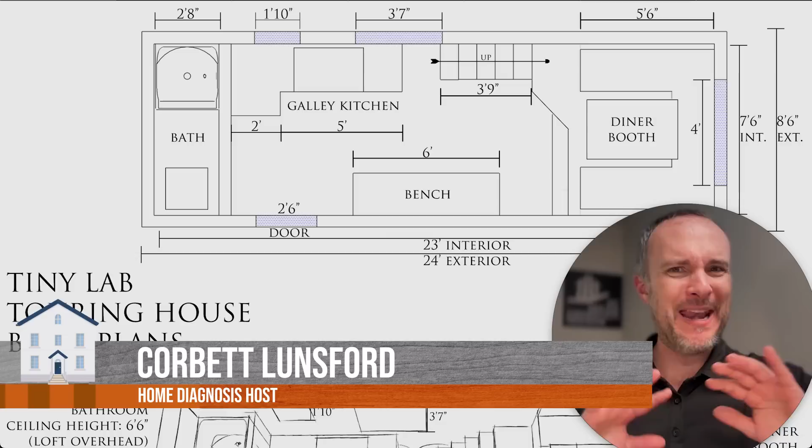I got asked a couple times recently whether we sell floor plans for high performance homes, and I am not an architect. I will show you a couple of the floor plans that we created that we then showed to architects and said, here, fix whatever's wrong with this. But I'd like to show you floor plans that I think are brilliant for certain reasons to do with performance, so that you can take those ideas, not necessarily the floor plans themselves, because every home should be different. I think that that's useful.

We'll start with the Tiny Lab. This is our high performance tiny house on wheels that we lived in for 5 years. This is what it looks like in real life. We built this. We built the plans ourselves. It took us about 9 months to a year to plan the thing. And we had to engineer this in very special ways.

When you put a tiny house on wheels on the highway, you're putting it through basically an earthquake and a hurricane at the same time. And we did that for 13,000 miles. So this thing is built like a tank. I edit these videos in that office right now. We haven't lived in there for a while because it was temporary. We lived in there for 5 years with 2 cats, 2 adults, and 2 kids by the end. And it was pretty tight.

So this is what the floor plan for that looked like. And I'd like to just show you the first basic level of circulation that I came to when I was designing this. It was very important to me that we have, obviously, spot exhaust. And when we talk about the 5 factors for ventilation, we got circulation. So we really wanted to handle that in this tiny space, make sure that air is moving around within it. Capture, which is what the bathroom and the kitchen are for. Humidity control, dilution air, pressure relief.

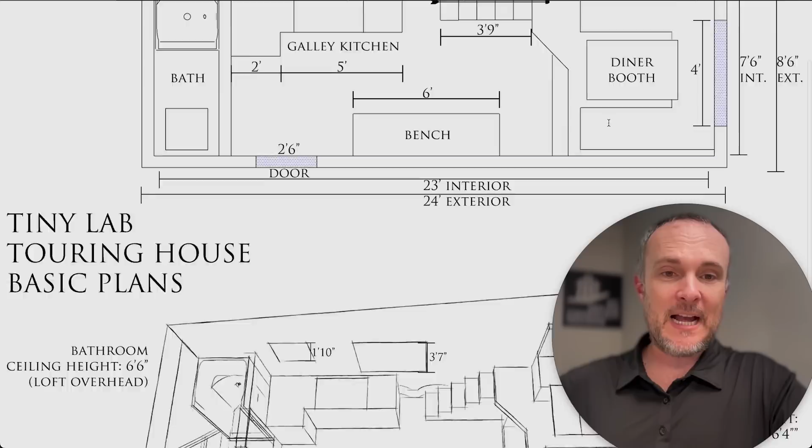And then at the other end is where we live. So the dining booth up top and then the sleeping loft underneath. And you can see here, there's the dining booth with the 2 seats and the table that folds out. Underneath this, which is up a small set of stairs, underneath that is the sleeping loft.

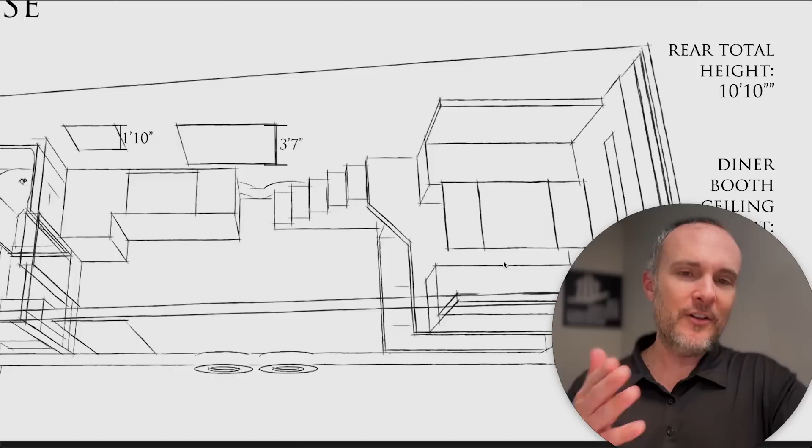And so we wanted to have fresh air supplied, just like any home, to places that you're sure you're going to spend a lot of time in. Bedrooms are a classic example. So if you're thinking about delivering fresh air, deliver fresh air to bedrooms. That's brilliant because you're going to spend 8 hours a night there, hopefully. And then also to the dining loft, which is also where we would set up our computers and work when we had time to while we were on the road.

And then air would flow from this positive end of the house all the way over here and get exhausted from the kitchen because of the kitchen exhaust. That's the only one-way exhaust that existed in this house. And the ERV extract, which was over the shower. So this one-way flow of air really solved a lot of things for us.

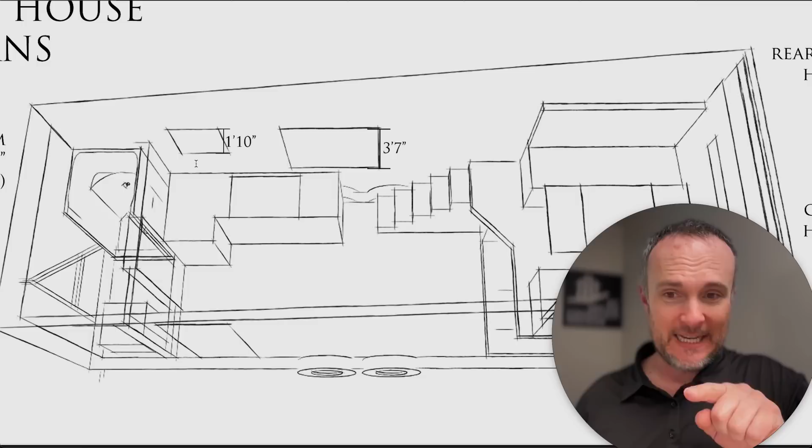And I will tell you that I had to design 4 ventilation systems to get this thing right finally. I went through Panasonic, Zehnder, went back to Panasonic, and then settled on a Broan ERV before they had the AI. It was the smallest one that they could make. It was 70 CFM. And for tiny homes, that small amount of airflow is very important.

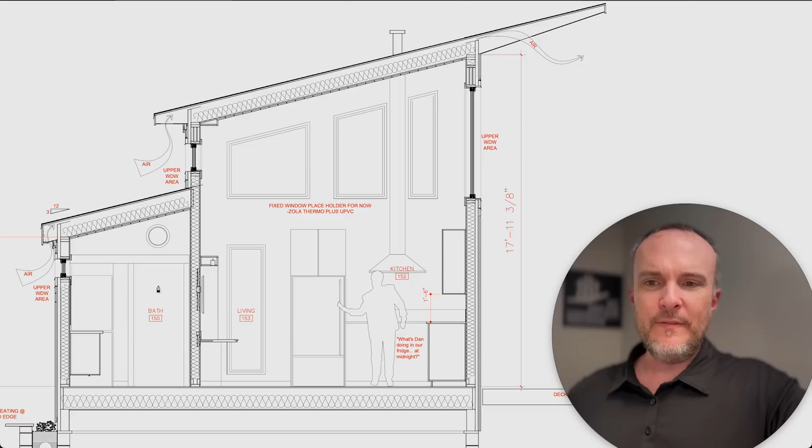Let me show you another tiny home. This is not one that's on wheels. This is an actual ADU that's from a friend of mine named Vic. And this is an awesome plan. He did not know how awesome it was until he showed me. So we've got this really cool vault with this very huge overhang. We've got the bathroom being in the lower part of it, and then the kind of main living space. I like what this person is doing. It looks like a dance move.

So in this floor plan, what is so cool about this is that we have a flow, just like we have in the Tiny Lab, where it's from one side to the other, which is the same as in the room that I'm in right now, by the way. The studio in my house goes from one side to the other.

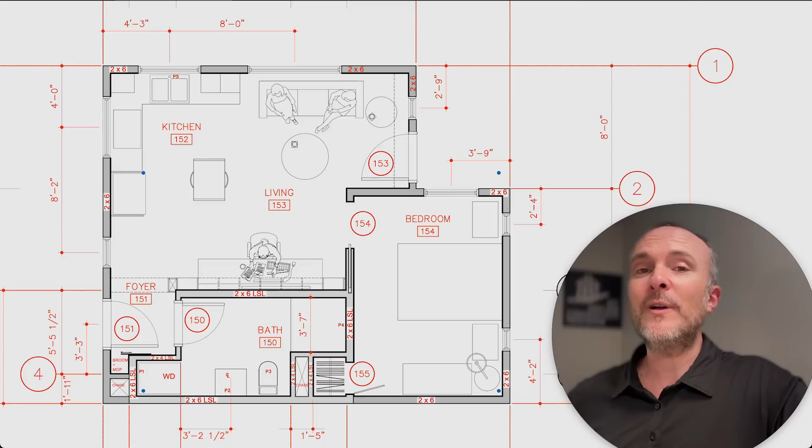I'll show that at the end. This one doesn't have a straight line. What this one has is instead a circle. So we have magically, the architect did not do this on purpose. This architect is really cool. I really like working with him. We've had several meetings so far trying to perfect this HVAC system.

What's brilliant about this is that we can introduce air in the bedroom so that now the bedroom contains the freshest air in the house. And we can circulate it around in this circle and then subtract it from the bathroom inside the shower. And that air will have essentially impacted every single space. Here, I've kind of waved it, and my point there is ceiling fan. In that big, tall room, you definitely want a ceiling fan in there. So the air that's coming out of the bedroom will mix around in this room and then be drawn back to complete the circle.

That's awesome. And in fact, when we drop the ceiling over this bathroom and then drop the ceiling over the bedroom, which I think they've actually opted to snake out and around with ductwork, we can also introduce the conditioning into this room, and then return the conditioning from this side. So we've got the ERV and the filtration and the conditioning, the heat pump, all following that same circular pathway. And I think that's very, very cool. If you're looking at a small home design, think about doing that, because that is always something that's very useful.

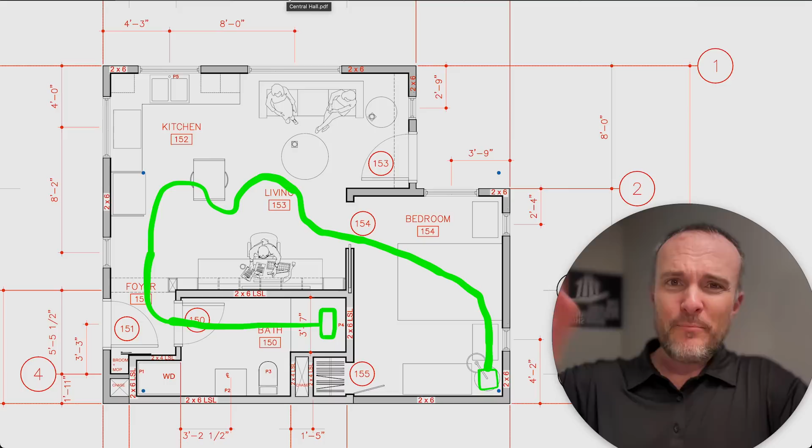It's just like bathrooms, right? I have a video about bathroom design. If you can put the toilet between the door and the shower, it works better every single time, because the air goes in and it passes by the toilet on the way to the shower. You get a 2-for-1. When you start putting the bed over there in the corner and then the bathroom and everything, it gets real complicated. So anyway, I really like that.

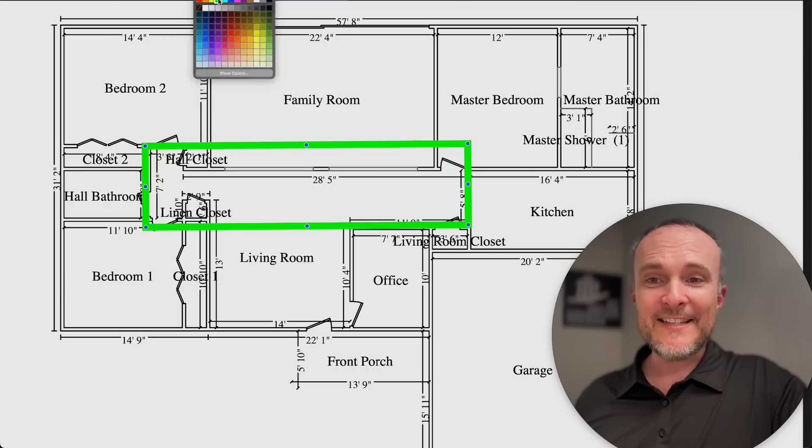Here's a slightly bigger house. I made an entire video about this floor plan that was in a home that was affected by the hurricanes. And what's brilliant about this plan, aside from the fact that it's very compact, and some people who like compact floor plans are going to be like, yay, it's great, is this. This is a central hallway, which we can use to deliver all kinds of cool things. We got those 5 factors. Circulation, we can circulate the air from there. Capture and filtration, humidity control, dilution air, pressure relief.

We can do almost all of these from either a dropped ceiling or what's called a reverse soffit, which is a raised portion up into the attic that we can then air seal and insulate over the top of. So if we were to just do that, we could deliver all of those factors of ventilation to each one of these rooms because we can get at them. That's brilliant and also accidental.

A lot of times people are not building a house that's shaped like this. When you've got a square lot, people think automatically square house. Square house has some problems because there are a lot of rooms inside of it that are going to be loadless, meaning they have no exposure to outside. In this house, every single one of these rooms has an exposure to outside, which means that every single one of these rooms gets a supply of conditioned air.

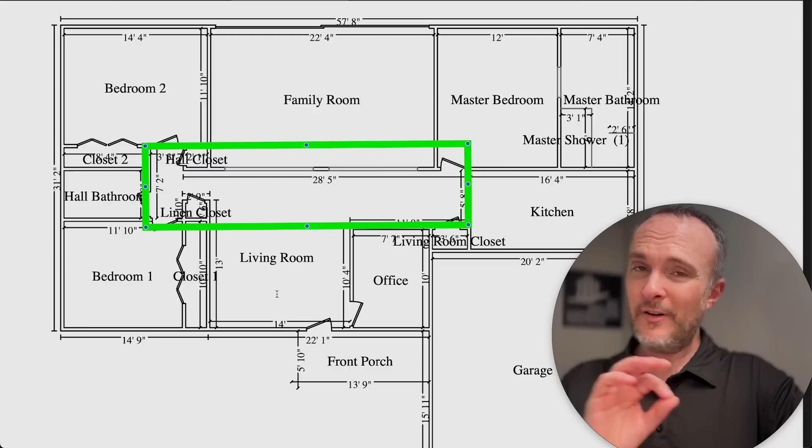So if we're building an interstate highway through the house with one central duct system, even if it's a small duct system, and in this case, the video that I made pointed out that I was talking about a ducted mini split, so it's a very small duct system, even then, we can deliver everything that we need to all these rooms.

Here is an example of a home that has a little bit of a problem. This is the first floor of a multi-story home, and I'm going to show you how we saved this. This was the first iteration of one of my friends, Tony. He was kind of messing around. He had found a floor plan online. And this often happens, by the way. If you're out there looking at floor plans, if you're asking people like me, not an architect, for floor plans, you're definitely out there just Googling floor plans. And you might come across one that you're like, ooh, I like it.

Trying to fit performance onto a floor plan is pretty difficult. And I'll show you, again, my forever home with Grace that we designed that started from thinking about performance and kind of what that leads you to. And hopefully it would lead you to a slightly different place than it led us, because every home should be different, like I said.

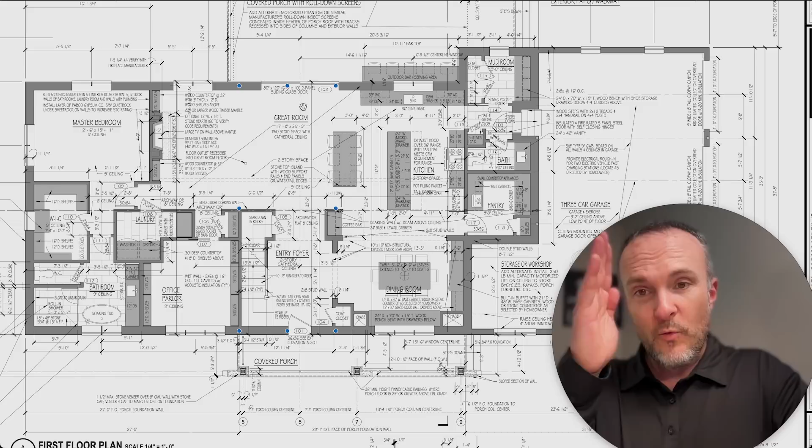But the problem here is that we've got this entry foyer. You can see it says 2-story cathedral ceiling, which leads to a great room, which also says 2-story space with cathedral ceiling. What we have here is a giant red flag that is separating the two sides of the house. So now I cannot get ductwork from this side of the house over to this side of the house. And now we're locked into basically 2 systems.

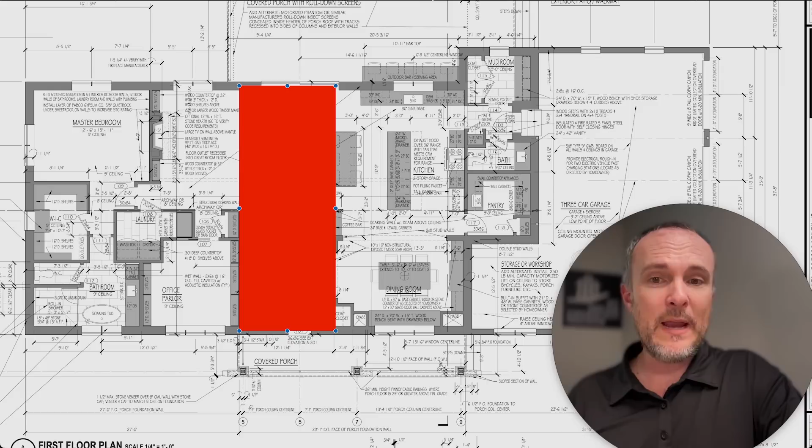We're saved by the fact that this house has a basement. So we can get at both of those sides from below. And now all we have to do, and this is bothering me, I'm going to take that away, let's do this instead. All we have to do is figure out a chaseway that we can use, a shaft essentially, to build into the house, which over here is pretty easy. We can steal it from the laundry. We can steal it from the office parlor. Even way over here in this walk-in closet if we wanted to.

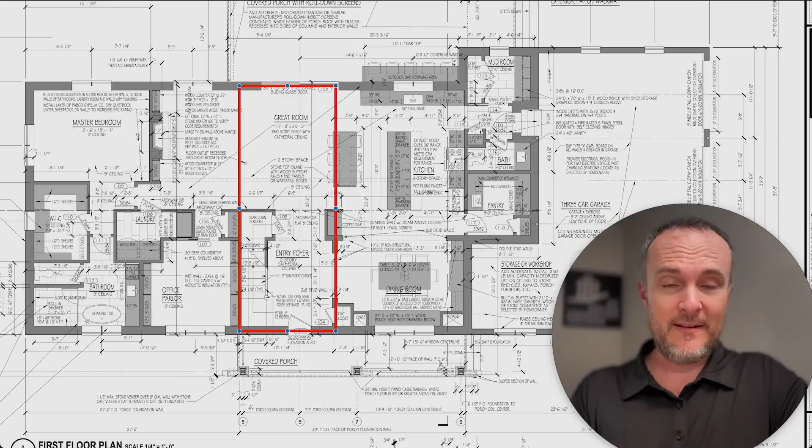Over here it gets more difficult. We're going to have to steal something from something that's probably valuable, and we've got all this space that looks pretty squared off. We're going to have to be bumping out, and some people get really upset by that. So if we've got this basement, we would want the utility room, and this happened in later iterations of Tony's plan. We moved the utility room to a more central location.

What my buddy Alex said in a recent video is it's called central air, not corner air. The more in the corner you shove your HVAC systems, the harder they have to work to get the air all the way across the house. If you put this thing right in the middle, you split it immediately. That basically cuts the resistance in half of all of the duct system that branches off from it. So this is one way to fix that, move the utility room more central, next to the staircase would be great.

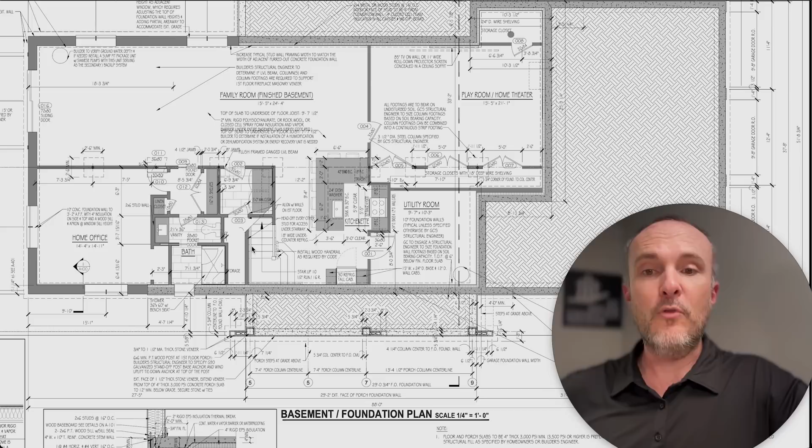Now, also on the top floor of this, Tony started out wanting to have an unvented attic. Vented attics are a great idea. In fact, I have a video with Matt Risinger where I try to sell him that a conditioned crawl space is always better than a conditioned attic. And at the end of that video, he agrees with me. Not spoiler alert, but he can't do conditioned crawl spaces because of where he builds.

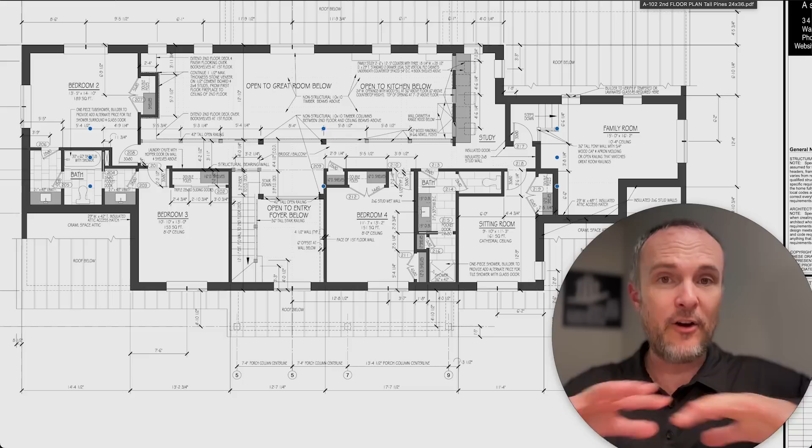So essentially, if you can do this below area, the basement, then great. You don't need an unvented or an encapsulated attic, because you can carry stuff through the basement to get it up there. In this case, we're going to save a lot of money by not spray foaming the roof plane. We could just blow insulation because gravity goes down. We could blow 2.5 feet of insulation. Really easy to air seal all this. And we happen to have in this plan this beautiful, same exact central hallway.

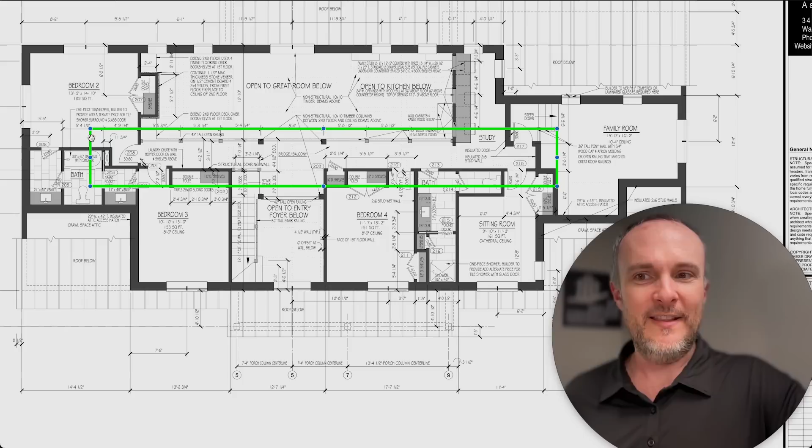Again, rectangular layout. We could put a reverse soffit up into the attic, which is totally possible if this was stick framed, which means you're using dimensional lumber, not trusses in the attic. If you use trusses in the attic, this becomes more difficult. You could still do it, but you've got to get around a lot of wood that's going on up there. So in this case, we can raise the ceiling and we can get up into the attic and we can deliver through ceiling registers into every single one of these rooms, each of which has a load again. We don't have any little orphan rooms that don't have a load.

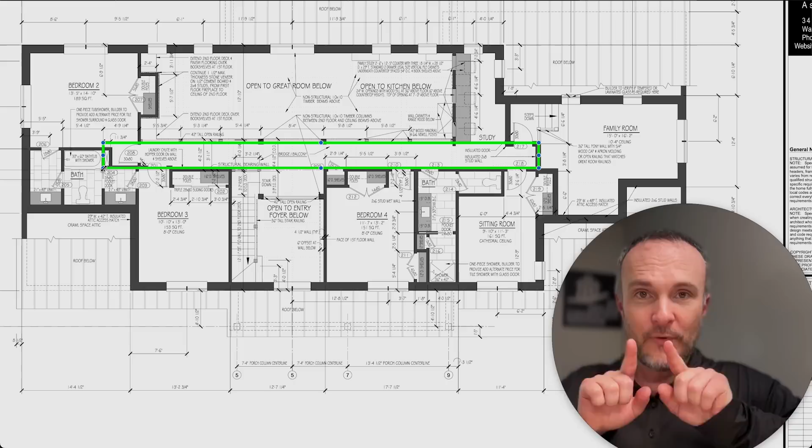Or if we had to, we could drop the ceiling in this hallway and we could introduce air from high on the side wall into every one of them, right? So basically right up by the ceiling, you'd come out of the wall and you'd be able to deliver air to every single one of these.

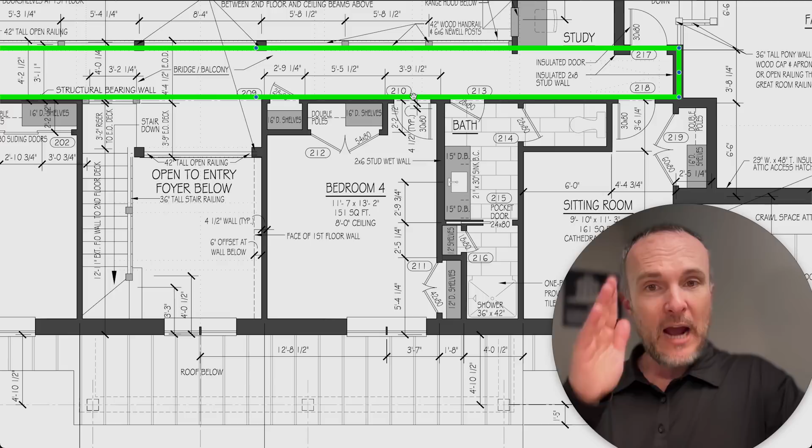Now here is one example of why I really like ceiling fans. If you had a ceiling fan in this room, you can deliver the air literally right on top of the door, and the ceiling fan will grab that air and make it go to the other side of the room. Otherwise, if we don't have the ceiling fans running, I'm going to deliver air up here, and maybe it's a mild day and your HVAC system's not running that hard. It's going to just poof a little bit of air in over here. The bed is way over here. The air is going to turn around immediately and want to go out through the undercut on the door. It's not going anywhere close to the bed.

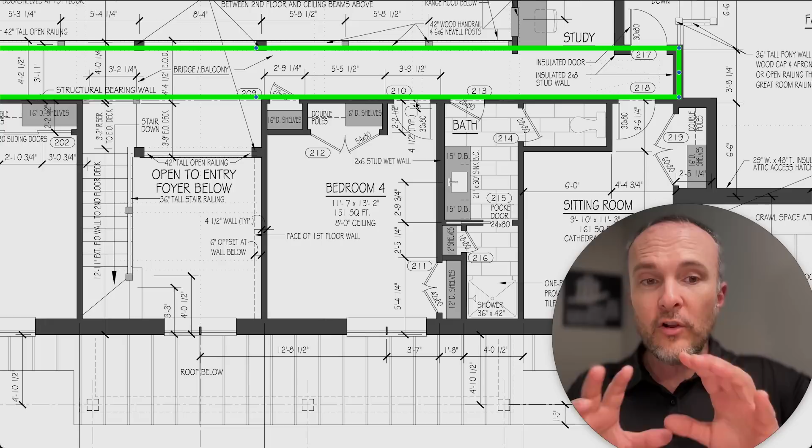And in a high-performance home, remember, we're using that interstate highway of ductwork, that one ductwork that connects every room, to deliver not just conditioned air, but also fresh air and humidity-controlled air. And all of that you want to be passing by your bed on its way outside. So if it leaves the room before actually going into the room, that becomes a problem.

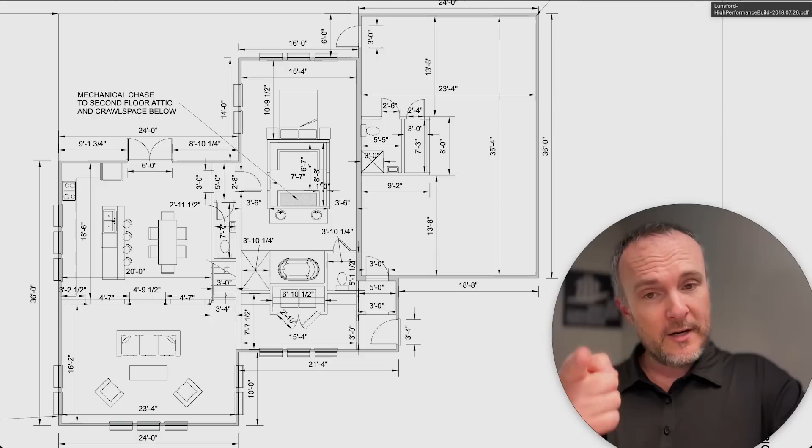So here is the last thing that I'd like to show you. This is our home. Our forever home in Atlanta. We designed this thing and then we gave it to our friend Jody Lomer-Giddens to say, like, hey, we're not architects and I want to make sure that this makes sense, that the hallways are the right sizes and we left enough room for toilets and all this stuff, because we were just building boxes basically. Part of the reason that this is so simple looking is because I was going to build it with my mom and dad, and none of us are builders, and I wanted to make sure that I had a simple shape to work with because I know how to build simple shapes, so I could do that.

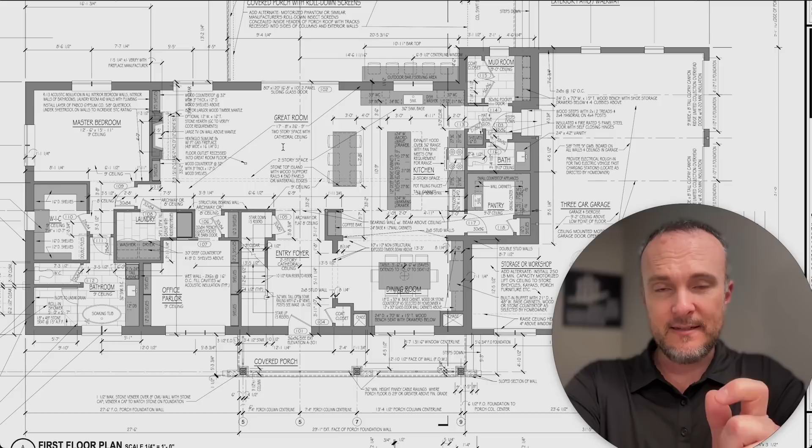The two things that I'd like to point out to you is, number one, where in Tony's case, we had this central great room, and this is a very common thing in a lot of architect-designed floor plans. You have the central space be central in the social life of the home, and it's like in the middle of the house. That becomes a problem because now we can't put a shaft into the middle of the house. And the shaft that I built into the middle of our house is dead middle of our house. Goes right up from the crawl space up into the second floor ceiling.

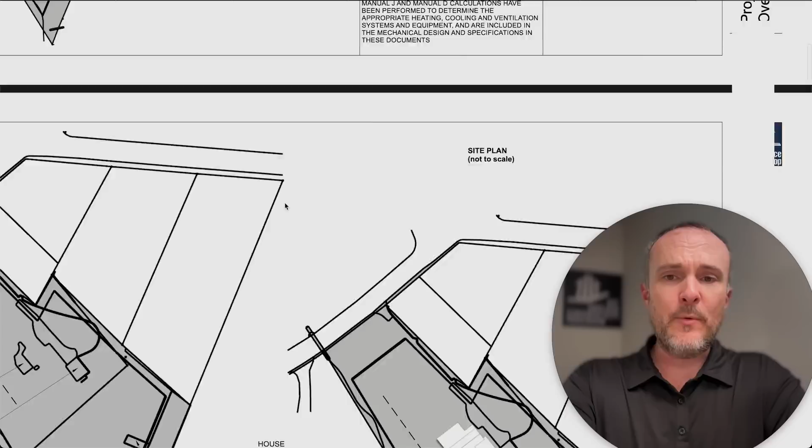But over here is our main living space. You can see not central at all. It's on the side. And we have between 10-foot ceilings here and 16-foot ceilings here where the stairwell goes up. And that's a really nice big space. And it doesn't have to be in the middle of the house. So just take that under advisement, because now I can deliver air. It's not in the way. I don't need to pass through that space to get air anyplace else on the other side of it.

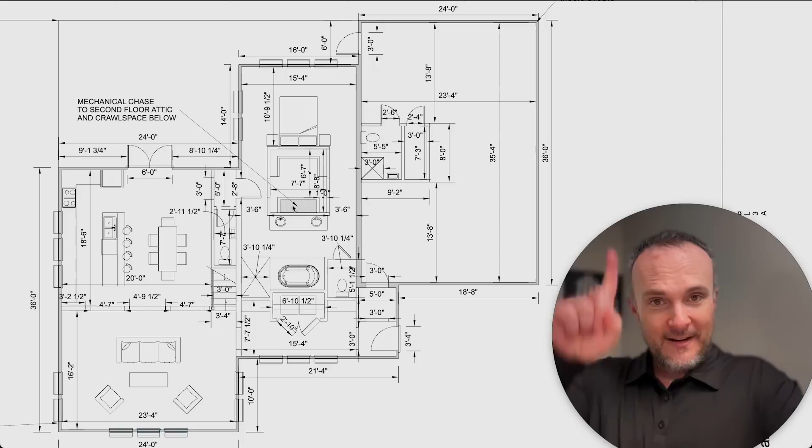That's really good. I have the crawl space underneath it for things like makeup air for my kitchen exhaust, which is over here, for plumbing, for water heating, all that stuff. And the shaft really enables us to do this. I actually overplanned the shaft. This is, as you can see, about 5 feet long and maybe only 2 feet deep. Is that what it says? I think that's right. And that is so big that actually I didn't need it for all the ductwork that I need to run up to the second floor. My dad built a ladder in there for me out of 2x4. So I can climb all the way up through my house from the crawl space to the very tip top of the house through that little shaft. I think that that's pretty brilliant.

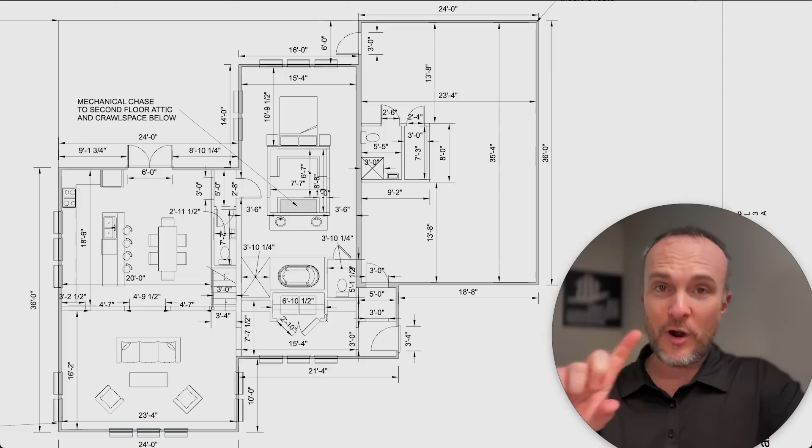One thing that I would say real quick, spoiler alert, when we do our update, our 4 or 5 year update on this house, is that this laundry room is also central, and I would have insulated the walls of this laundry room. Not because of the laundry, but because the water treatment stuff is in there. Those water filters have a backwash cycle that is insanely loud. And if you program it like most people do for the middle of the night, that thing is going to scream at you at 4 a.m. We've figured it out now, and we've gotten used to it also.

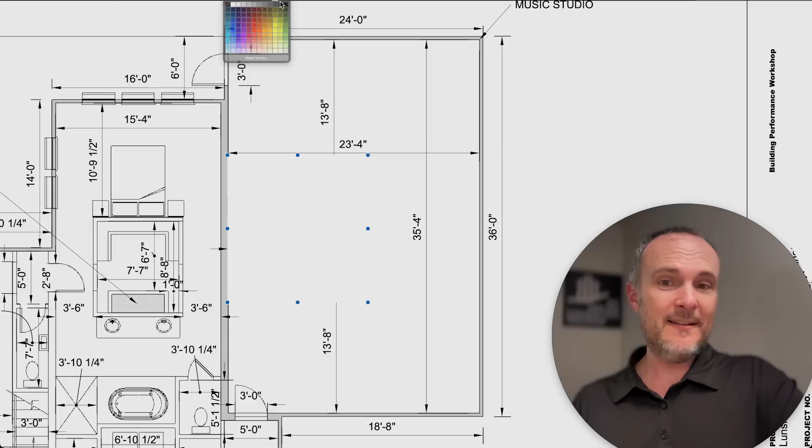This happens to be where the door is, and so this air will be the most humid potentially. So the dehumidifier was installed right here. I used to have an in-wall dehu, and it bit the dust a couple years ago. This one right here, though, is the intake for the dehumidifier, so it's drawing from probably the most humid place in the house. This entire space has its own conditioning and ventilation and dehumidification and filtration system.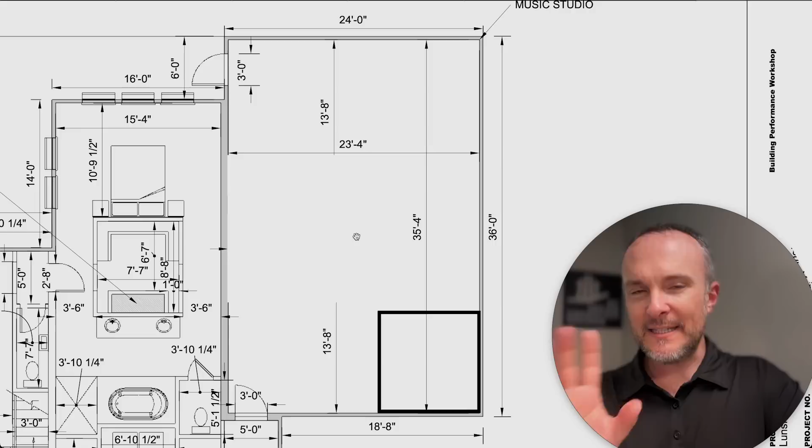And by the way, I've got 3 duct systems in this crawl space because I have a ductless mini split feeding heating and cooling into this room. So just consider all of that as you're doing this. Think about the 5 factors, again, just to review: circulation, capture and filtration, humidity control, dilution air, and pressure relief, and try and find ways to deliver all of that to each one of the spaces within your home that needs it.

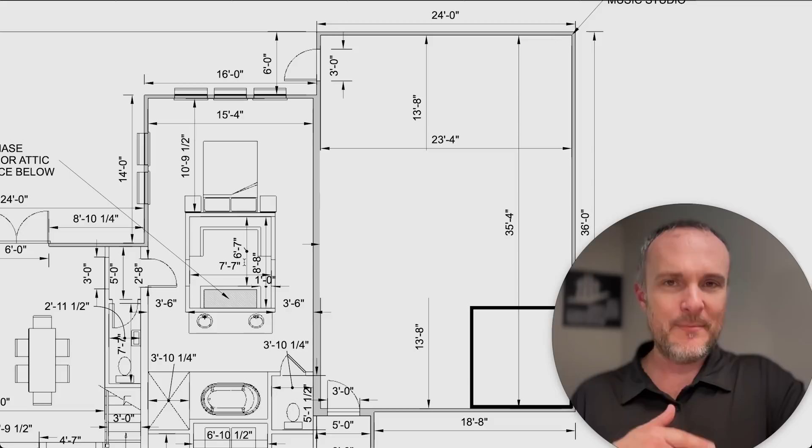Some of these interior rooms, like for example my walk-in closet here, don't have a load. It's what I call a loadless room. Therefore, we don't need to deliver heating and cooling to that room. If we did, it would be overheated in the wintertime and overcooled in the summertime. But we do need to figure out ways to get all of this ductwork in here.

Now, the one last thing that I would point out on this plan, which is something that I have pointed out before, is that I wanted to have no floor registers in my house. I also wanted to have no wall outlets on exterior walls. So for example, along this wall right here, where you have to have wall outlets every 8 feet per code, we did floor outlets instead, so that I wouldn't put electrical and outlets in my walls, because my walls were for insulation and air sealing only, and water control obviously on the outside.

But the other thing is that I didn't want to have floor outlets of air. I didn't want to have floor grills or floor registers. Largely because gravity goes down, and I have 3 kids, and if they drop a crayon or drop juice or something, it's going to go inside my duct registers, and I don't like that. So I wanted to get the air off of people, because the number one rule in duct design is to not blow air on people. And one of the main ways you could do that is by getting the grills up by the ceiling.

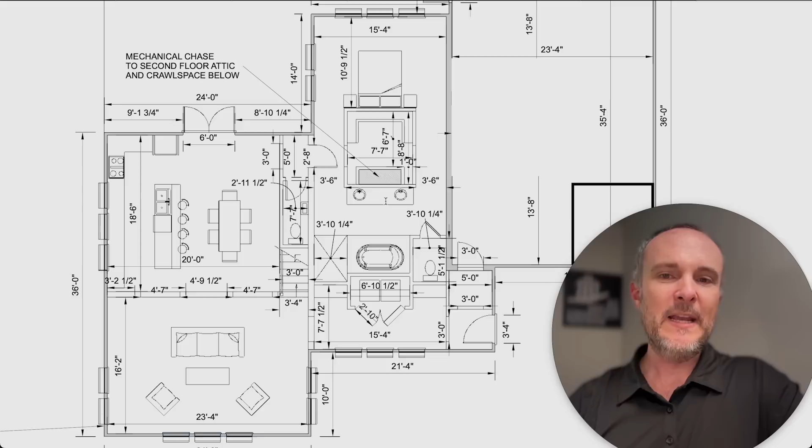And we've got 9-foot ceilings in the central space here. We've got between 10 and 16-foot ceilings here, 9 foot here. Again, this is another big room that is the exact mirror of this one. So what we ended up doing was going up through walls. And this was really easy in the bathroom. I drew from underneath the stairs. We've got the central return right here underneath the stairs in this kind of cavity. I'm drawing the toilet exhaust from the wall right here.

If I need to supply air to this room, then I need to figure out how to do that. And that was a big conundrum for me for a while. I ended up doing it in 3 places. One is soffitting right here, up, and then pushing air along the wall. And you take advantage of something called the Coanda effect. When you take air up and deliver it near the ceiling, it glues itself to the ceiling. You can also glue it to a wall, and it travels 30% further into that room by gluing itself to a surface, so that it's not just poofing out into the middle of a bunch of air.

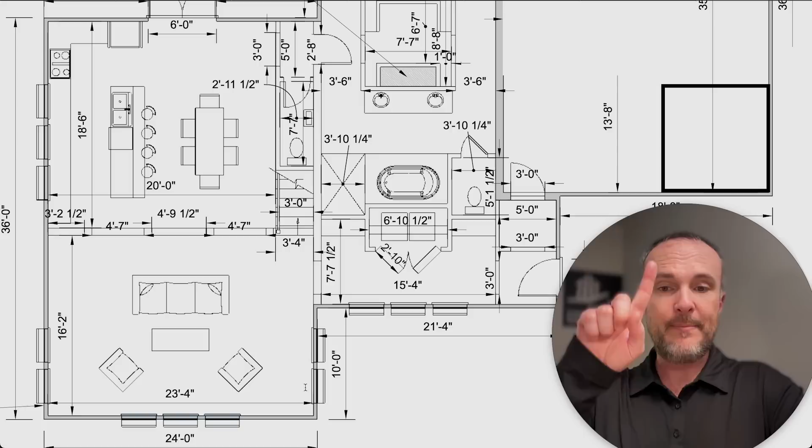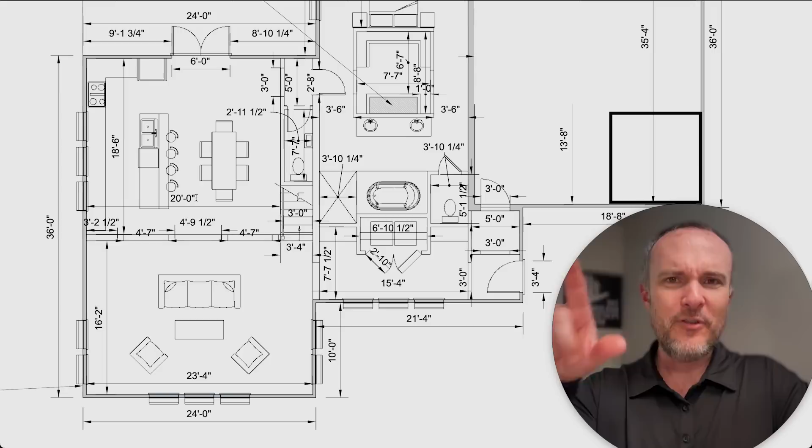I have a second soffit here where we've made this a diagonal. I take this all the way up to deliver by the wall and by the ceiling, and it travels down and through the room. And then another one that's over your head as you travel up the stairs. 3 vents for this gigantic room. It's more than enough. Do not worry about that. I have clients sometimes who are like, I want more vents. And what happens, of course, when an HVAC designer adds more vents for you is that they just cut the output of the 1 vent that you just made into 2 in half. I don't think that really helps anybody.

So thinking through how you're going to deliver the air, where you're going to deliver the air, what all those 5 factors are within the actual confines of the challenge that you put yourself into with this floor plan is very important.